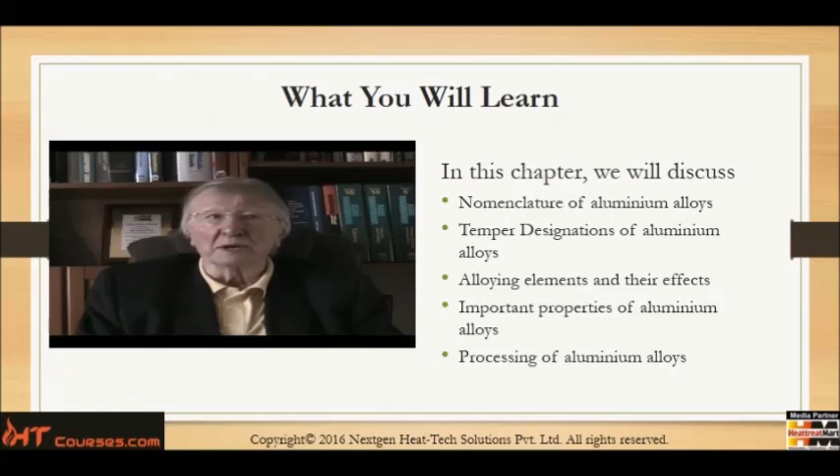Aluminum on its own has literally no usable strength, save that of being soft. It's very much like iron. Iron on its own exists in a soft condition and cannot become hard until we add small amounts of carbon. Then we can manipulate the strength of the iron by thermal methods.

Pure aluminum cannot be strengthened by thermal processing in any way, shape or form. However, aluminum and its alloys can be mechanically manipulated and work hardened to some extent. Aluminum can be annealed if it has been work hardened.

Therefore, we consider the addition of alloying elements to produce aluminum alloys of various mechanical properties. Some of the alloy elements that are added make it possible to be treated thermally to produce specific mechanical properties.

The source of the aluminum is the ore which is named bauxite. Aluminum is one of the most prolific elements in the Earth's crust, taking up approximately 8%, after oxygen and silicon. The metal is non-magnetic, it's soft, silvery and coloured.

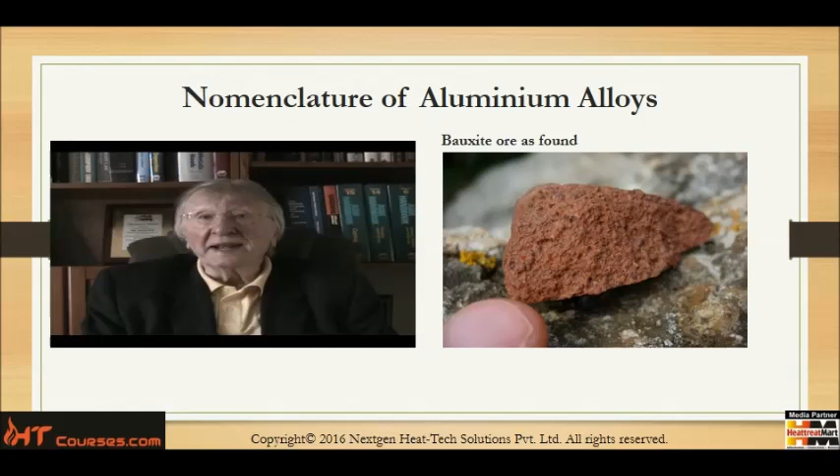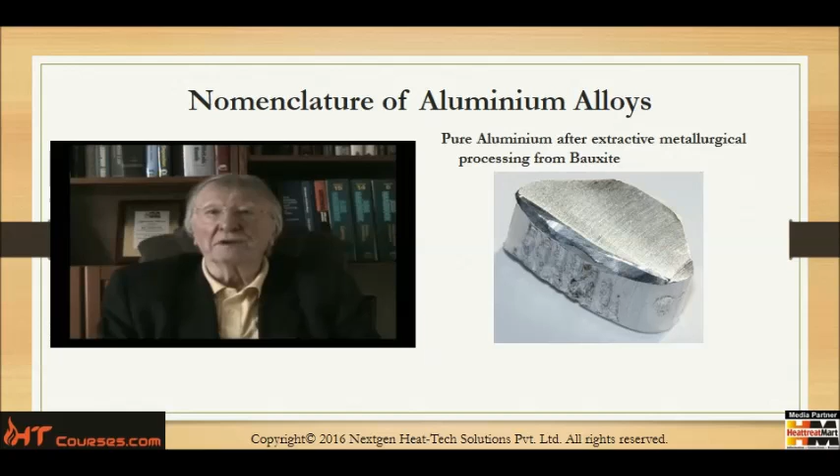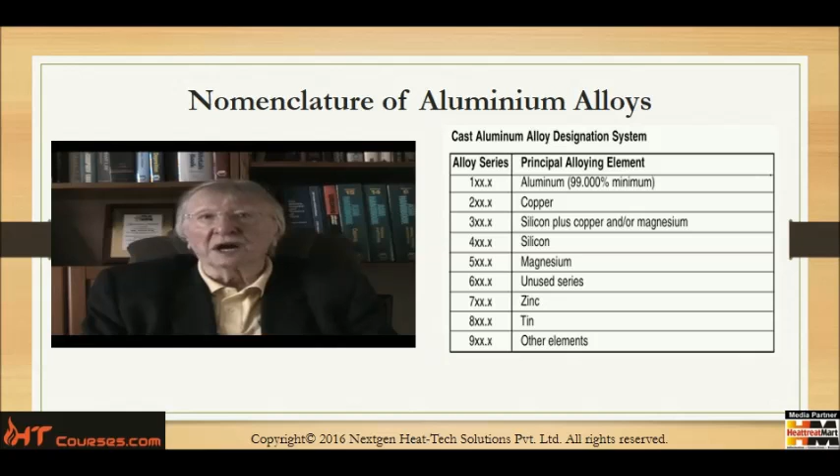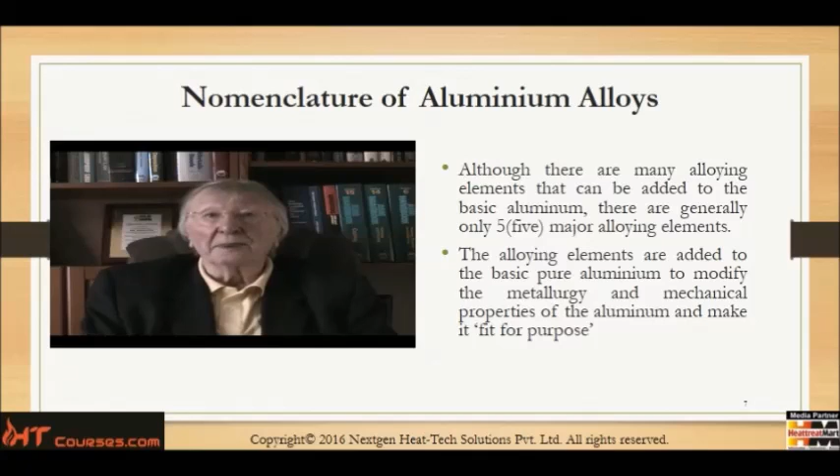Although there are many alloying elements that can be added to the basic aluminum, there are generally only five elements that we add. The alloying elements are added to the basic pure aluminum at the melting procedure.

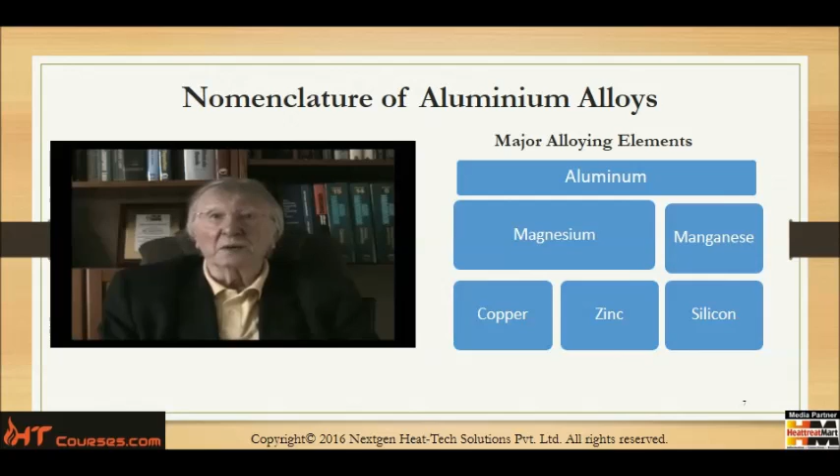This shows the grouping of the aluminum with those five elements. In the top block we have pure aluminum, and then we can alloy it with magnesium, which is just below aluminum, or manganese, which is also just below aluminum, or copper or zinc, which is below magnesium, or silicon, which is below manganese.

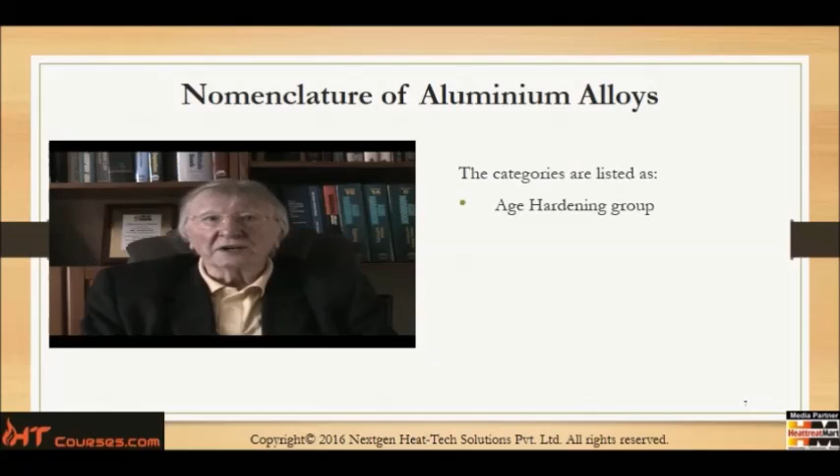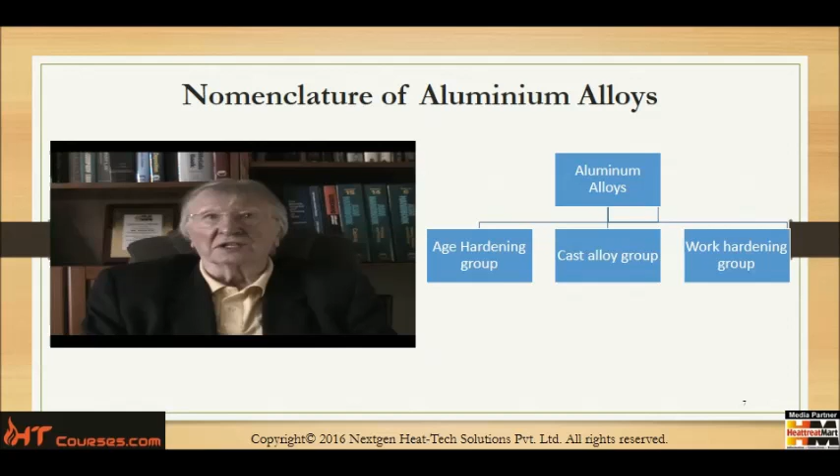So, from the categories and with the alloy element additions to the aluminum, we're now able to identify the different groups of aluminum. These alloy groups are shown in the next slide. The identification nomenclature is a very simple and easy method to follow.

We'll start with the non-heat treatable aluminum alloys. You'll see in the top left-hand corner the box that says the non-heat treatable aluminum alloys. Below that we have the 1000 series, which is nothing but pure aluminum.

And to the right of that we have the 3XXX, which is aluminum plus manganese. Below that line we have 4XXX, which is pure aluminum alloyed with silicon, 5XXX alloyed with pure aluminum and magnesium, and then 8XXX, which is aluminum and other specific alloys.

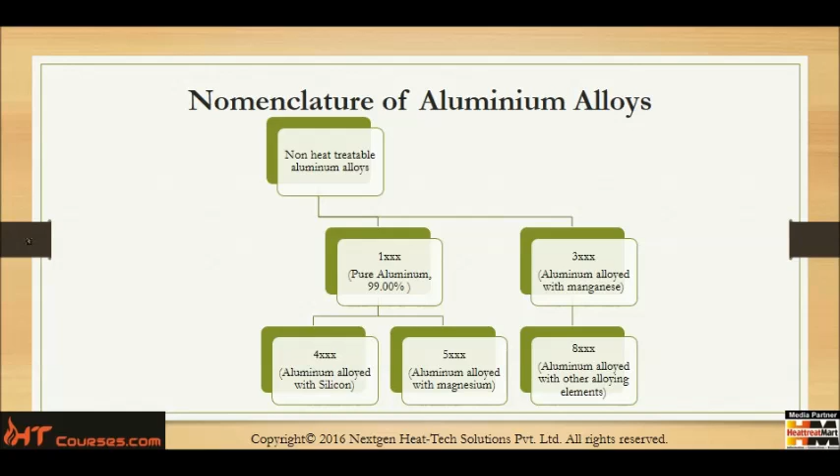These alloys are added all to manipulate the properties of the aluminum. This has an illustration of the groups of aluminum alloys in their numeration, 1XXX right through to 8XXX. It also shows the principal alloying element.

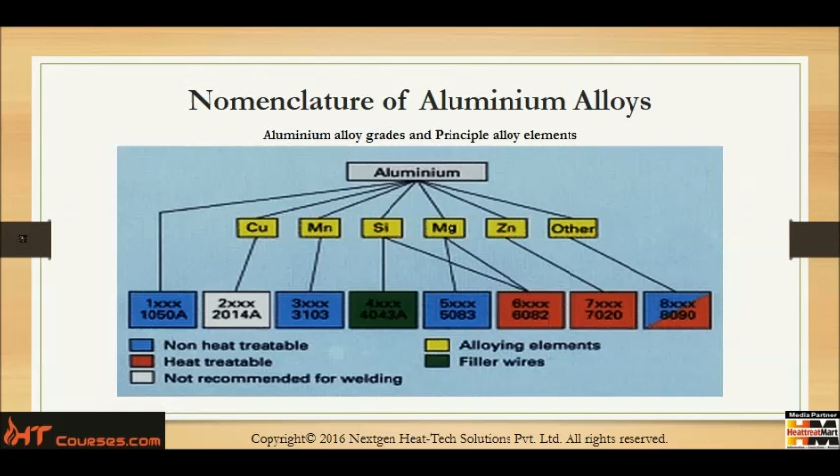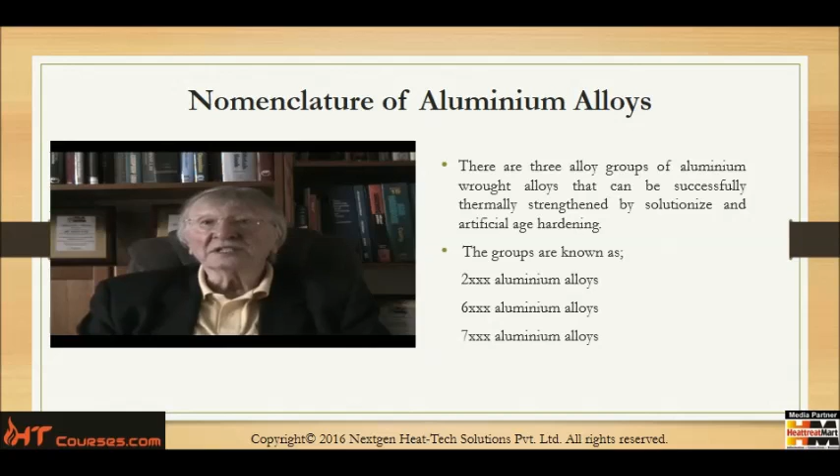Principally, there are three groups of aluminum wrought alloys that can be successfully thermally strengthened by solutionizing and artificial aging. Those groups are the 2XXX aluminum alloys that are heat treatable, the 6XXX aluminum alloys that are heat treatable, and the 7XXX aluminum alloys that are heat treatable.

This is an application of aluminum where it's used, for example, in aircraft structures, on undercarriage components, structural components, and of course on the surface covering.

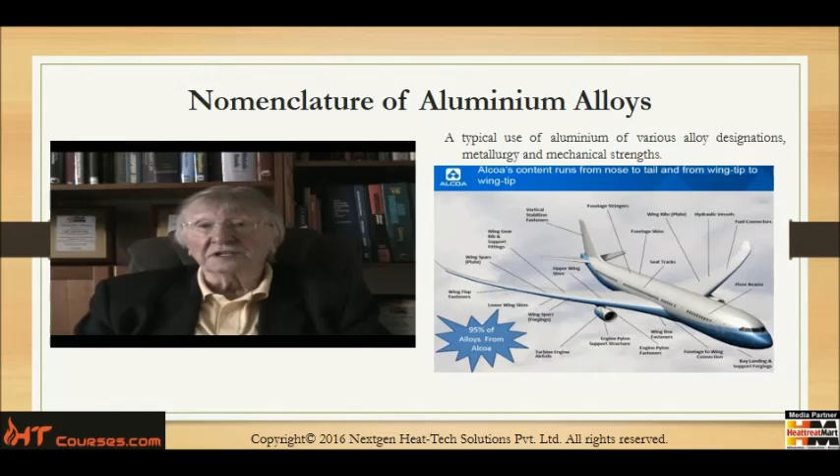This scene now shows a tree formation of the heat treatable aluminum alloys. The top one is heat treatable aluminum alloys.

Below that, on the bottom line, is the 2XXX aluminum alloys, and that with copper is strengthened by heat treatment. The 6XXX next to it is aluminum plus silicon, magnesium, and that too is thermally strengthened by heat treatment. The 7XXX on the right hand side is pure aluminum plus zinc, also thermally strengthened by heat treatment.

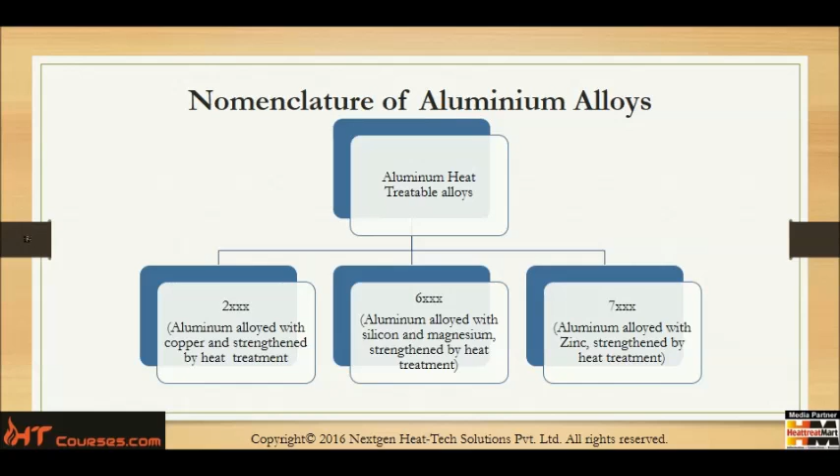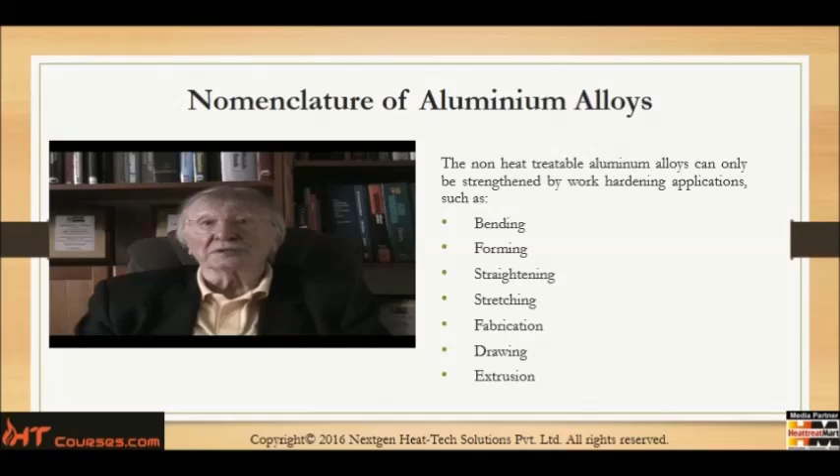The non-heat treatable aluminum alloys can only be strengthened by work hardening, through operations like bending, forming, straightening, stretching, fabrication, drawing, and extrusion. The only thermal treatment that can be given to non-heat treatable aluminum alloys are those that will anneal or stress relieve. There are no other thermal strengthening treatments that can be applied to these alloys.

Now let's get more descriptive. Starting with the non-heat treatable aluminum alloys, we have the 1XXX, which is 99% pure aluminum, plus a trace of iron, plus a trace of silicon, plus 0.12% maximum of copper. This has a fairly low tensile strength of 90 MPa, and it's used principally for sheet metals.

3XXX alloys use manganese as the principal alloying element with pure aluminum, to specifications such as AA3003, which is AA1100 plus 1.25% manganese. The tensile strength now begins to increase slightly, to 110 megapascals, and it's a general purpose alloy.

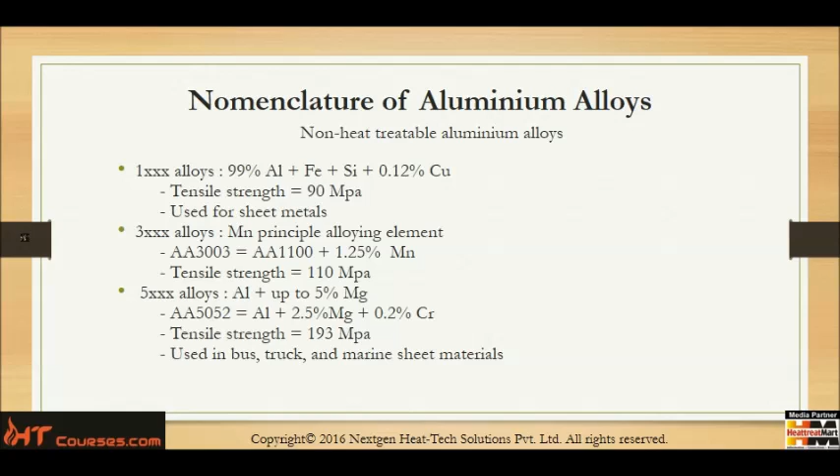Now we move to the 5XXX, which is pure aluminum with up to 5% magnesium, identified also as AA5052, which is pure aluminum plus 2.5% magnesium, 0.2% chromium. The tensile strength now increases quite significantly to 193 megapascals. You'll find it used principally in bus, truck, and marine sheet metals.

Moving to the heat-treatable alloys, we now have 2XXX, which is aluminum plus copper plus magnesium, sometimes identified as AA2024, that is aluminum plus 4.5% copper plus 1.5% magnesium plus 0.6% manganese. The tensile strength now increases quite dramatically to 442 megapascals. This alloy is used principally in aircraft structures.

6XXX is aluminum plus magnesium plus silicon, which embraces specifications such as 6061, that is aluminum plus 1% magnesium plus 0.6% silicon plus 0.3% copper plus 0.2% chrome. The tensile strength now increases up to approximately 290 megapascals, and it's used for general purpose structures.

The 7XXX is aluminum plus zinc plus magnesium plus copper, translated to specification 7075, that is aluminum plus 5.6% zinc plus 2.5% magnesium, 1.6% copper and 0.25% chromium. The tensile strength now increases up to approximately 504 megapascals, and it's once again used for aircraft structures.

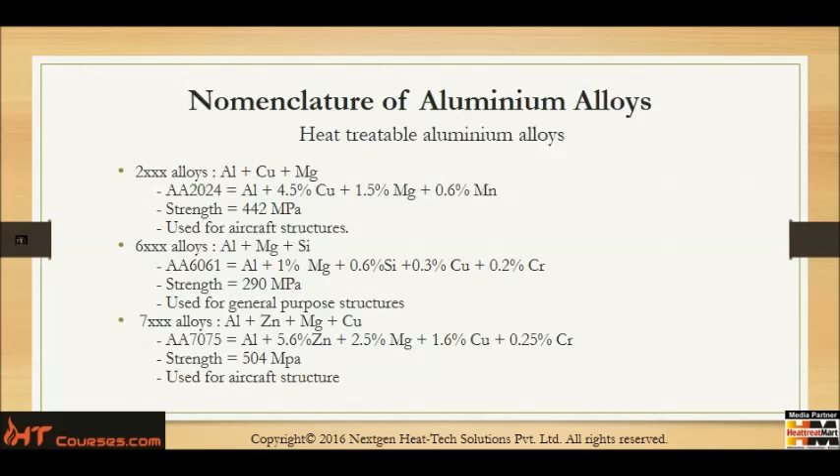The first one we consider is antimony. This is used in very small quantities to improve corrosion resistance. Beryllium will tend to reduce oxidation at elevated operating temperatures, both for solutionizing and the part operational temperature. Bismuth is added to assist in the free machining characteristics of aluminum alloys.

Boron is added to the aluminum alloy as a grain refiner and to improve the electrical conductivity of the aluminum alloy. It's sometimes seen with titanium as an added alloy.

Cadmium, because of its low melting temperature in liquids, is not used in significant amounts, generally up to say 0.3%. Chromium has a large effect on the resistivity of the aluminum alloy and is a common element added in amounts that do not exceed 0.35%. If the chromium content does exceed 0.35%, it'll tend to form very coarse constituents within the aluminum alloy.

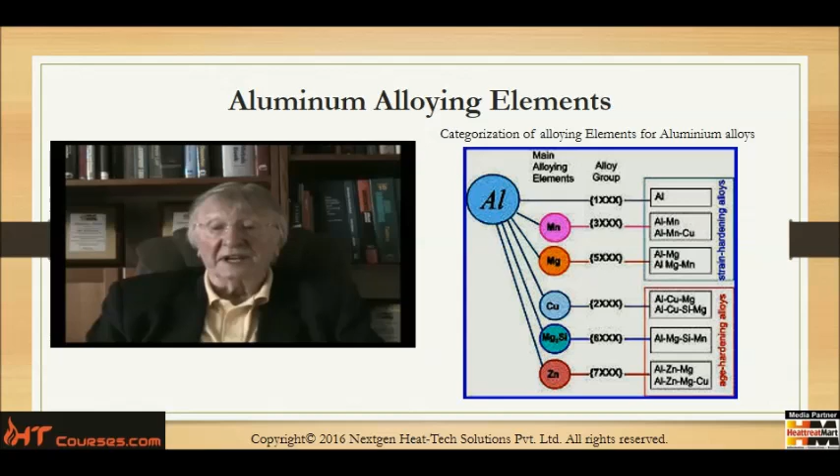We'll now demonstrate the principal aluminum alloys in relation to nomenclature and identification. There are many alloying elements and combinations of alloying elements that can be added to aluminum to improve tensile strength, impact strength, stress corrosion cracking reduction, recrystallization temperature, solutionizing temperature, and precipitation or artificial age hardening.

We'll give you an illustration of the alloy numbers in relation to the treatment given, in relation to the yield stress, UTS, and percentage strain at failure.

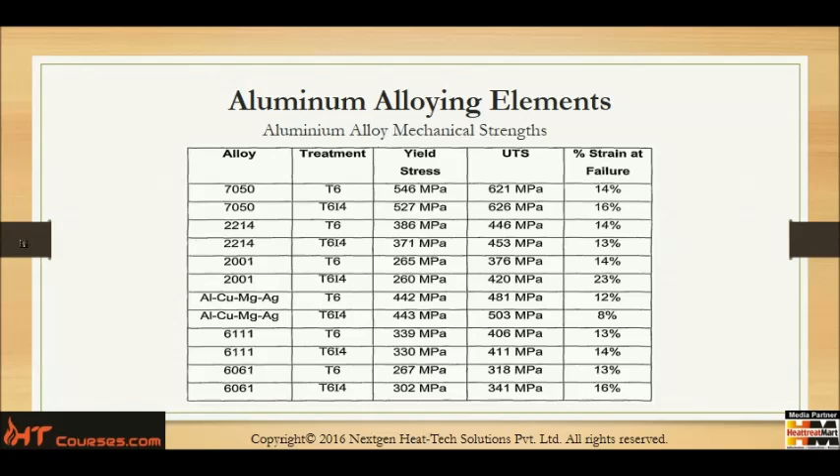Not all the possible alloying elements have been listed here. The content is simply too great to be covered in this presentation, so the previous list of principal alloying elements will be sufficient for this presentation. Each alloying element or group of alloying elements will affect the strengthening mechanisms, and the mechanical and metallurgical strengths and weaknesses.

Temper hardness values. This section is going to discuss the identification of temper hardness. The designations are generally shown as follows.

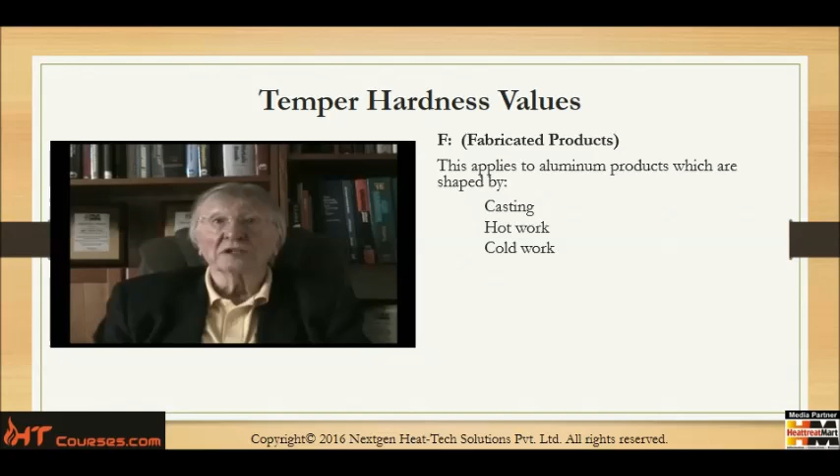If you see the prefix F, it simply means fabricated products, and this applies to aluminum products which are shaped by casting, hot work, or cold work.

The O prefix is for annealed products. This applies to wrought products that require annealing to obtain the lowest strength temper. The designation is also applied to cast products that have been annealed to improve both mechanical properties and dimensional stability.

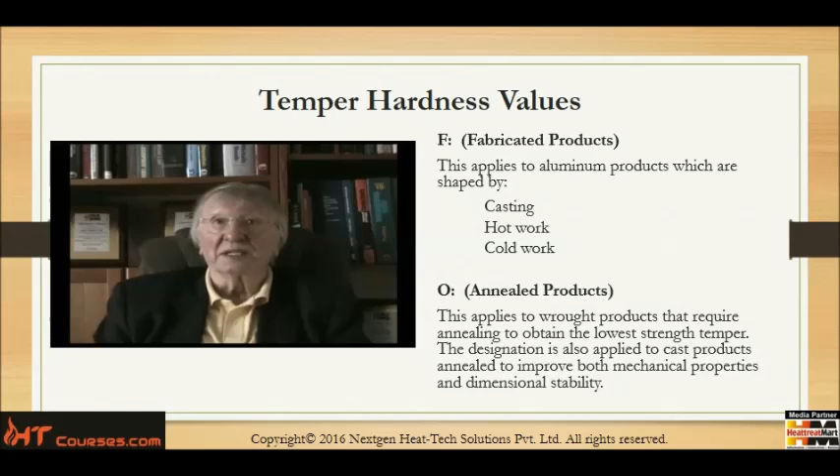The H series is strain hardened, on wrought products only. This means the aluminum alloy has been strengthened by strain hardening and has or has not had additional heat treatment to produce a reduction in strength. After the H designation, it is usually followed by 2 or more digits.

The W prefix is water solution heat treated. This prefix is given to alloys whose mechanical strength changes naturally at room temperature over an extended time period.

Heat treatable alloys. This system is based on aluminum alloys, both cast and wrought, which are heat treatable and employ the prefix of T or W.

T1 means cooled from an elevated temperature after shaping and naturally aged to an almost stable condition. T2 is cooled from an elevated temperature shaping process, followed by cold working and naturally aged to an almost stable condition. T3 is solution treated, cold worked, and naturally aged to an almost stable condition.

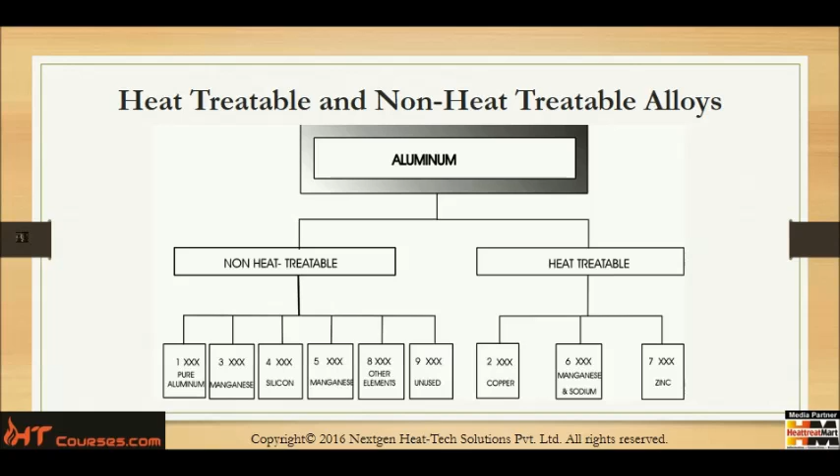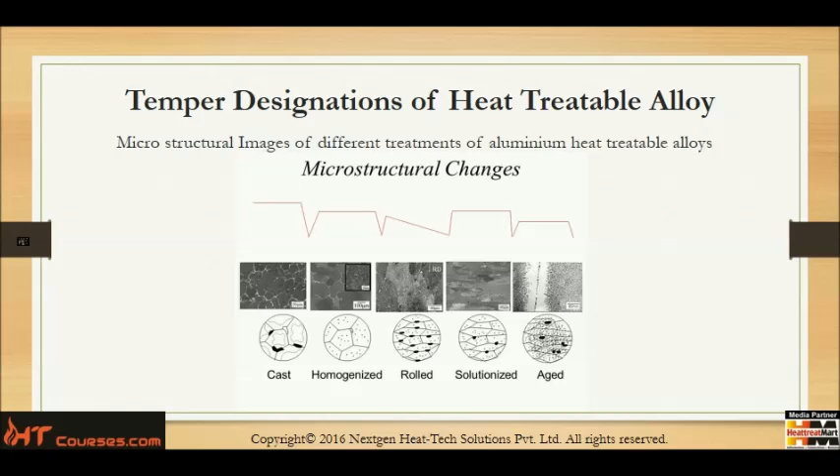An illustration that shows you some of the photomicrographs that can be accomplished. Below the photomicrograph, you'll see small sketches, and those small sketches are our effort to try and bring a closer and further understanding of what is actually happening.

TX52 applies to stress relief by compression products after solution treatment. TX54, this applies to forgings that have been stress relieved by restriking whilst in the die.

T42 means solution treated from the O condition or F condition to demonstrate response to heat treatment, followed by natural aging to demonstrate its response.

T62 is solution treated from the O or F condition to demonstrate response to heat treatment for artificial aging.

Generally, what you will see is T1, that's cooled and naturally aged at room temperature. T4, solution treated and naturally aged at room temperature. T6, solution treated and artificially aged. T8, solution treated, cold worked and artificially aged.

There are additional T variations shown as TX51 that applies to plate, rolled or cold finished rod and bar. TX510 is extruded rod, bar shapes and drawn tubing. TX511 are products that may receive minor straightening after stretching.

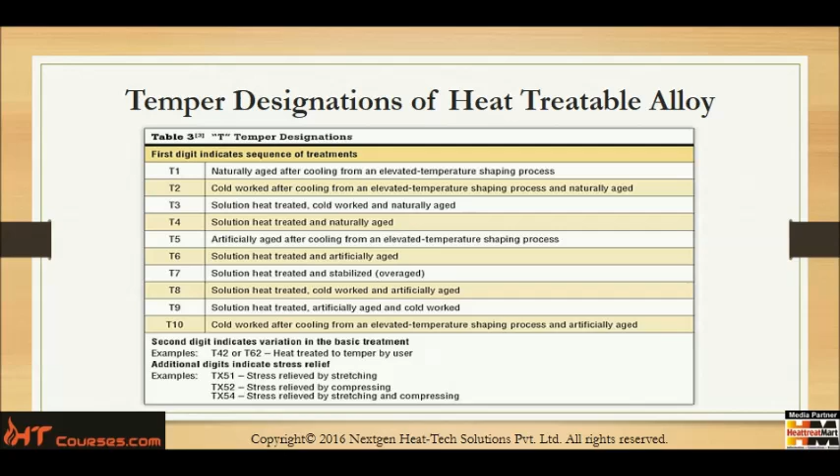Just an illustration, a tabular form of the T numbers for your information.

Important properties of aluminum alloys. Magnetic properties. The magnetic property of aluminum and its various alloy and groups can also be affected by the alloying elements. In addition, there is always another influence that we don't always consider, and that is, at room temperature, the aluminum is oxidizing very slowly to form aluminum oxide.

For operations such as extrusion or any hot forming operation, the aluminum surface will oxidize at a faster rate because of the process temperature and probable friction.

Continuing the important properties of aluminum alloys, if iron is present in the alloy, it will combine with aluminum to form iron aluminide. As the compound forms and as the process temperature increases, so does the reactivity of the alloy of iron and aluminum, as well as its magnetic permeability. This must not be forgotten. It is also considered to be paramagnetic.

Other alloying elements will also begin to change the magnetic permeability of that particular aluminum alloy. The formation of surface aluminum oxide will also begin to erode the wear and surface of, for example, shot sleeves for aluminum die casting, the bearing surface of an aluminum extrusion die. Aluminum oxide is extremely abrasive to both aluminum and to steel.

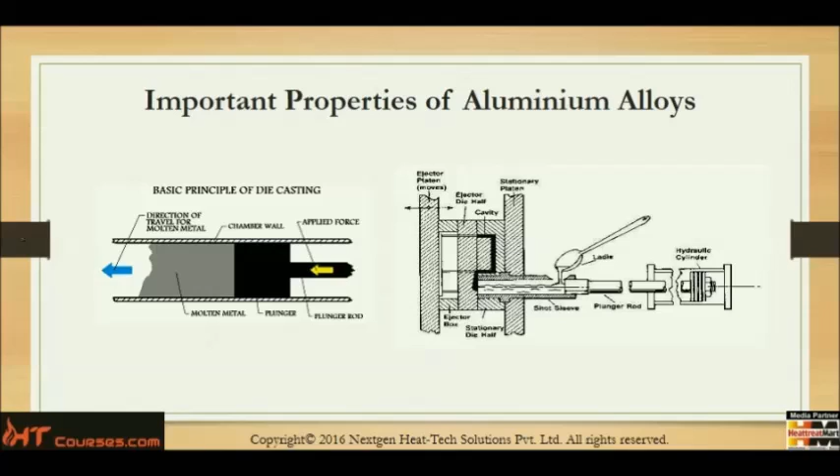Shows you a typical die casting system where the molten aluminum is being poured into the shot sleeve and then pushed into the die cavity. At this point in time, aluminum oxide is forming at its highest.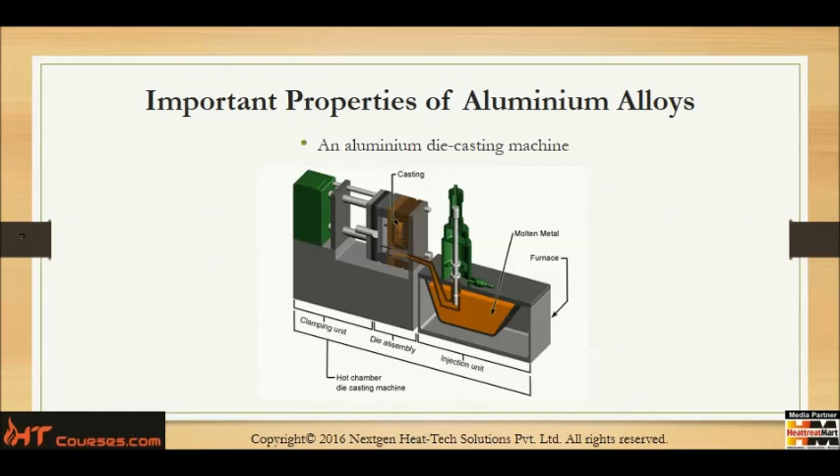Is just a generalization of what will happen to aluminum as it is heated. Aluminum will always oxidize at its surface when in contact with water, oxygen-bearing gases, or heat. Aluminum oxide will always form on the surface of aluminum as the temperature is increased. And please note that aluminum oxide is extremely abrasive.

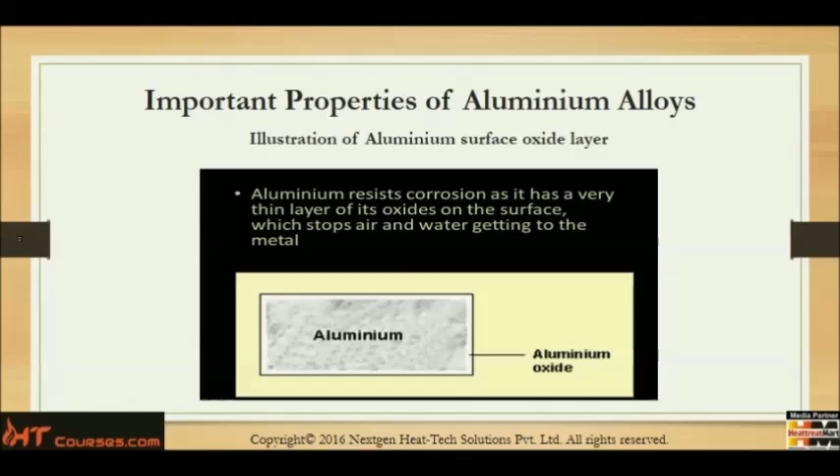It's showing what is happening to the aluminum at the surface when there is heat applied or it's in an oxidizing condition, where the external surface is oxidizing. It shows the aluminum oxide, which does provide a protective surface to further oxidation on the surface of the aluminum and protects the core.

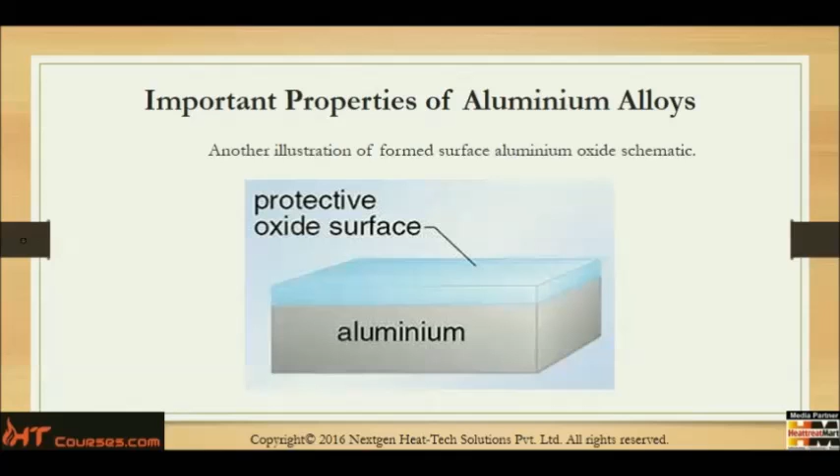What then can be done to stop aluminum oxide from forming? Can we process the aluminum alloy under a nitrogen atmosphere? Please do not lose sight of the fact that aluminum is one of the strongest nitride formers, so nitrogen has the potential to form hard spots on the surface of the aluminum. Those spots will not be deep, simply because of the residence time at temperature for solutionizing.

There are really only two atmospheres that are non-reactive with the aluminum at any selected process temperature, and those industrial gases are argon and helium. They will not make any reaction whatsoever. But please do not consider the use of any oxygen-bearing gas if the aluminum alloy surface is to be protected from the formation of surface oxide, such as CO, CO2, nitrous oxide, or steam, which will form oxide on the surface.

We're now getting into the specific heat of aluminum. The specific heat of pure aluminum is a relatively high value when compared with metals like iron or steel. The specific heat is of great importance when calculating energy requirements to heat the aluminum workload up to the solutionizing temperature, and also for the precipitation temperature. It should be noted that the specific heat of aluminum will increase as the temperature goes from ambient temperature right up to the melt temperature.

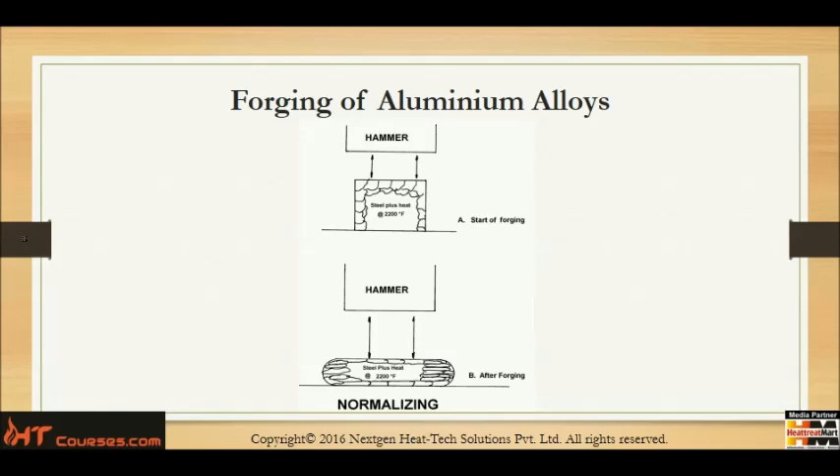Machining aluminum alloys. If the aluminum alloy is of the 1XXX series, that's pure aluminum at 99% purity, the machining practice in either turning or milling will give you a gummy surface condition when machining. In other words, it's not machining very cleanly, and the chips will tend to stick to the cutting tool surface. The alloying of the aluminum alloy will improve the machinability considerably.

This is because the alloy now has a degree of hardness, therefore the machinability is greatly improved. If the solutionizing has not been done correctly, that is, quenching too late from the solutionizing furnace or quenching too slowly from the solutionizing furnace, then the non-solute elements will act as chip breakers. However, out-of-solution elements such as manganese, chromium and silicon will also act as chip breakers, but the tool life will decrease proportionately.